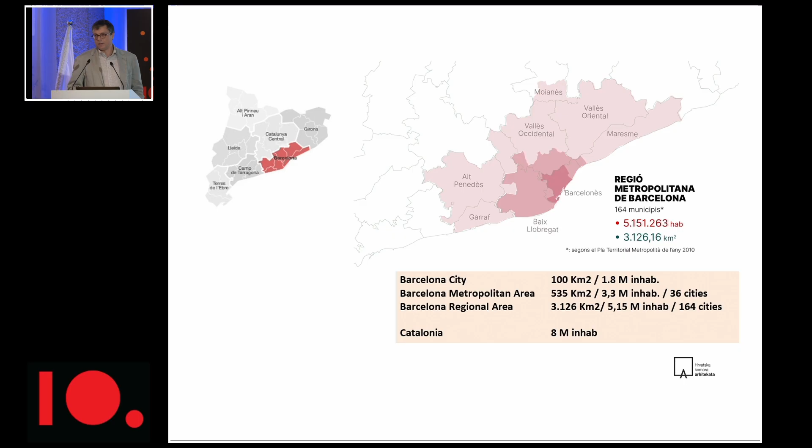Let me start by introducing the territory, because we will refer basically to two different territories. The city of Barcelona is actually a small city with only 100 square kilometers and almost 2 million people, but within a metropolitan area and regional area with 5 million people living there. We will also shift into Catalonia, the regional area, with 8 million people, though you can imagine most people concentrate in the central littoral area around the city of Barcelona.

Why do we say we are suffering a housing crisis in Barcelona, Catalonia, Spain, probably across Europe? The first figures show that 30% of income is the maximum recommended economic effort for families. The figures show that only 30% of families are spending less than 30% of their income right now. Even more, over 30% of families must spend more than 50% of their income to afford a house.

This means there are a lot of people who spend all their money on housing, and have no money left for culture, sport activities, or of course holidays. So this is a very serious problem right now.

Why is this situation happening? We have an important shortage of public and social housing in Spain, Barcelona and Catalonia, with only around 2% of the total housing units. For instance, in Barcelona we have 800,000 main units, and only 2% are social housing.

Over-tourism pressure is replacing fragile profiles like elderly people or families with children who cannot afford the rental prices and must move to other territories. It's right now one of the main concerns in the city, and many protests from neighborhood movements are asking the different administration levels to address the problem.

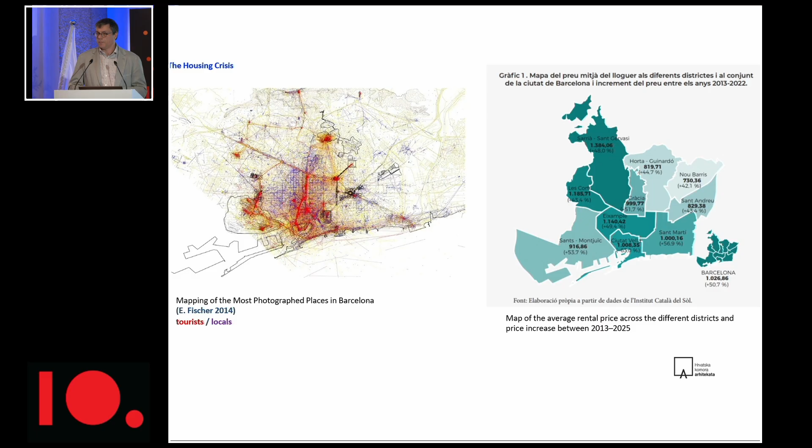We have another important problem: an unbalanced distribution of social housing across the city of Barcelona. This is because the only way to obtain land to build social housing was through new residential developments, which were mostly concentrated on the periphery. So 90% of the social housing right now is on the periphery. You can imagine this creates a social segregation effect across the city, which has also been an important issue to address.

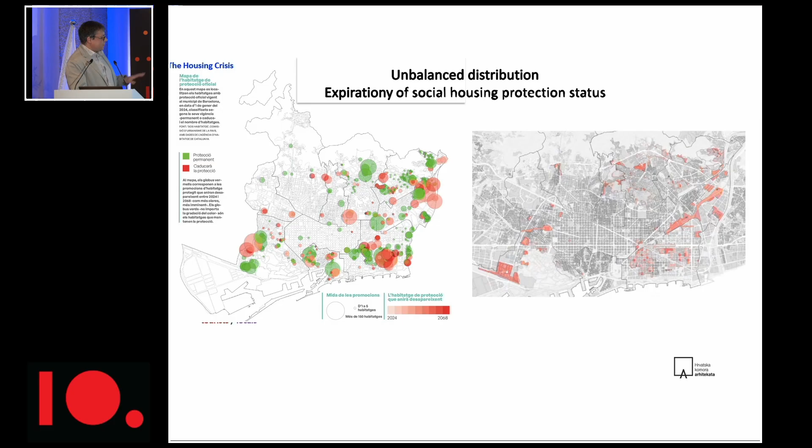That covers the problems. The second part is probably the most boring part of the lecture, about the legal framework in Catalonia, but I thought it was interesting to give you some main ideas about how this legal framework works.

We basically have two parallel tracks. There is a legal track on the urban planning framework coming from regional law, identifying the different planning levels from the territorial level down to the local plan. It's important to keep in mind that it's in this local plan where all public policies on social housing must be incorporated.

This includes the percentage of new social housing in new developments, the possibility of creating a specific zone identifying social housing, or even incorporating new tools like a preemption right — we'll talk about that later — or the 30% rule in this local urban planning document.

And parallel, we have the sectorial housing planning. The sectorial housing planning also has the same different scales, from the legal and different laws from 2007 with the right to housing law, the right to housing plan, and different amendments that have been incorporated later.

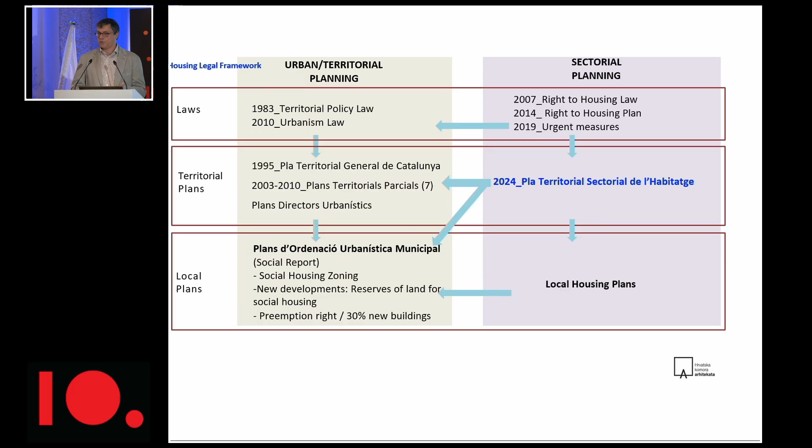It's important that we have recently approved a new territorial sectorial housing plan. This is the most important document right now. It's defining which are the future goals in terms of housing policies, and it's also defining which conditions must be incorporated into these territorial and local urban planning documents. There is a lower level where different cities can develop the goals coming from this territorial sectorial plan into local plans, identifying more detailed tools and actions to reach the goals coming from this higher scale.

About the different concepts, I've been talking about social housing. When we use the word social housing, we are also referring at the same time to public social housing, so the ownership is from the city or from the regional government. But social housing can also be private ownership, meaning there is a limited price for sale or for rental.

If we go into the territorial sectorial housing plan, Sere showed this picture before. Basically, the plan identifies which are the areas with the highest needs in terms of social housing. You can imagine where the population is concentrated, this dark gray color identifying the most needed areas in terms of social housing, areas with strong and proven residential demand.

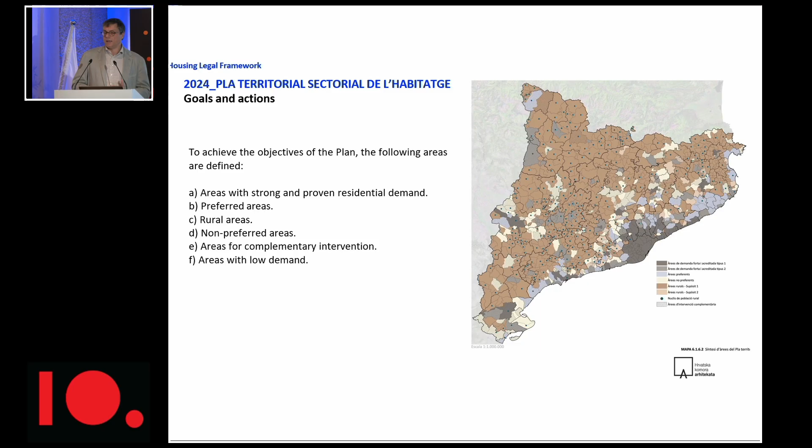The plan basically identifies 6 different levels according to the goals defined for each of these levels. For areas with strong and proven residential demand, the plan identifies a main goal, I think for the year 2045, that these different cities within the area will provide 15% of the total existing main dwellings as social housing. We are right now around 2%, so this is a huge challenge in order to reach the different goals in 20 years.

And the territorial sectorial plan is also providing different tools. Sorry, I don't want to miss this idea: between this 15% of social housing, 9% should be for rental and not for sale.

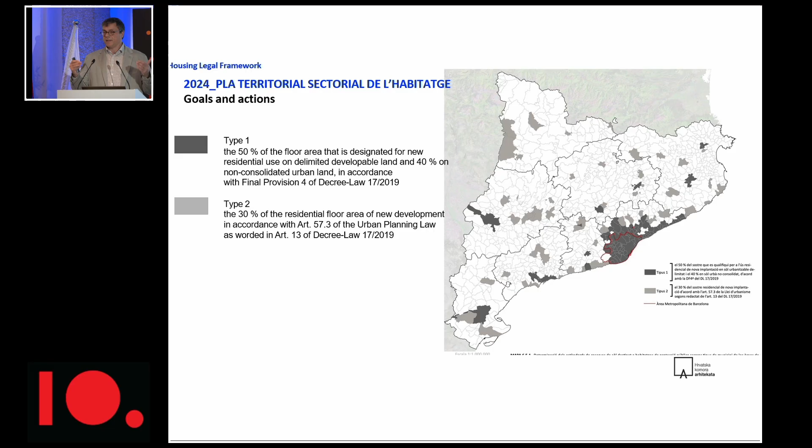The plan identifies for these highest demand areas some different conditions for new residential developments. For instance, for every new greenfield residential development, the project must preserve 50% of the total built floor for social housing, and for brownfield developments, 40%. Before this sectorial plan we were at 30% as an average across the territory, so the sectorial plan is upgrading the percentage that must be reserved in these new residential areas.

Okay, now let's step into the past to recover experience from 2008. You can imagine, considering the date, that it did not have a good finish because of the crisis at that time. But I thought it was interesting because at that moment we had a progressive regional government, and the government opened a new program aiming to develop 100 new residential areas across Catalonia.

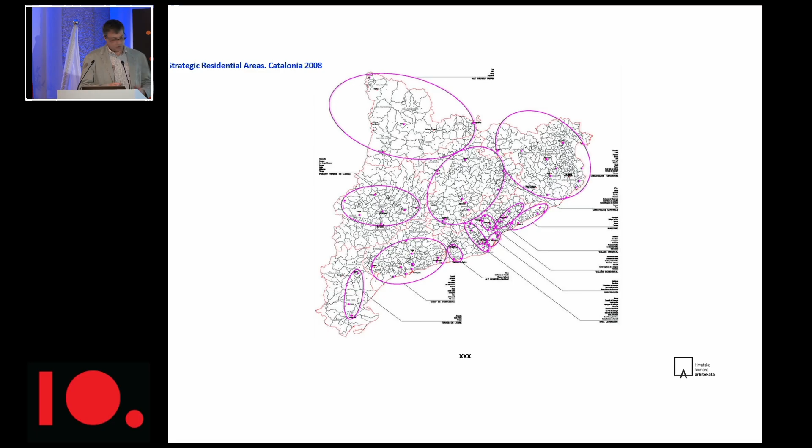You can see here the attempt to balance new residential areas across the different areas of Catalonia. Basically, the government opened a call to the city councils to receive proposals from the territory, and after receiving the proposals, identified these 100 new residential areas. There were different categories and sizes, from smaller ones to probably medium or large size areas with more than 800 dwellings.

And which were the conditions? Basically, the regional government provided the documents, affording the elaboration of plans and approving them, giving them already approved to the city councils to prepare the urban planning duties to be developed immediately. The conditions were that all these new residential areas had to allocate 50% of the total housing units as social ones. And it was also interesting, the program provided quality guidelines for residential development.

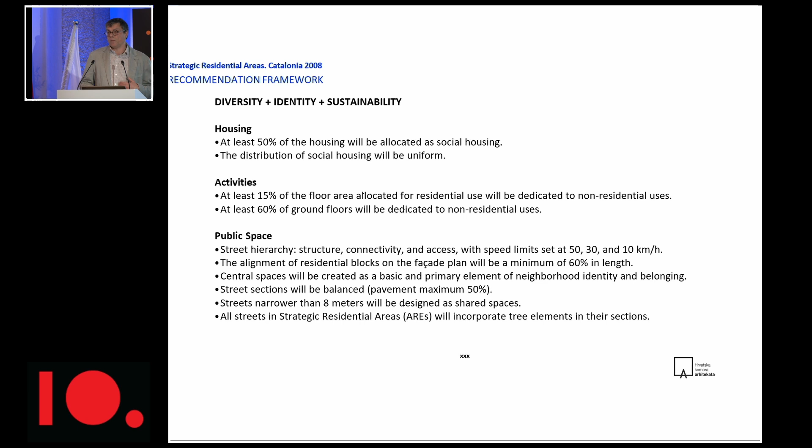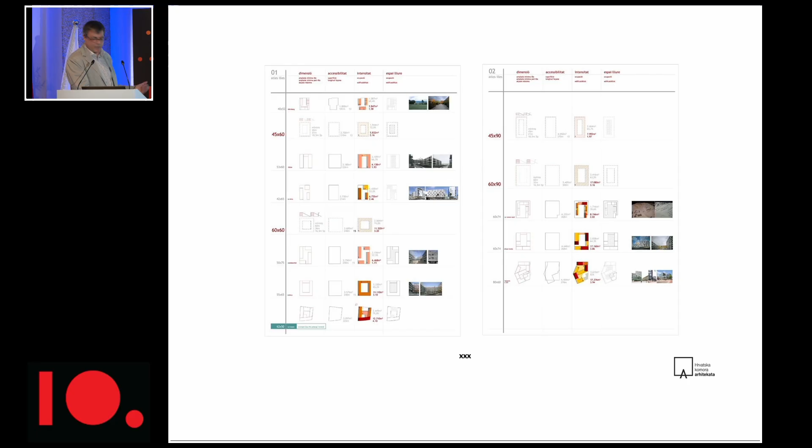I had the opportunity to work with the team who elaborated these guidelines for new residential areas in Catalonia, identifying good practices in terms of urban fabric or residential blocks, trying not just to develop a huge amount of new dwellings or residential areas, but incorporating new quality criteria in order to produce new urban fabrics with standards across all of them — standards on the urban morphology, we could say, with this new blocks catalog.

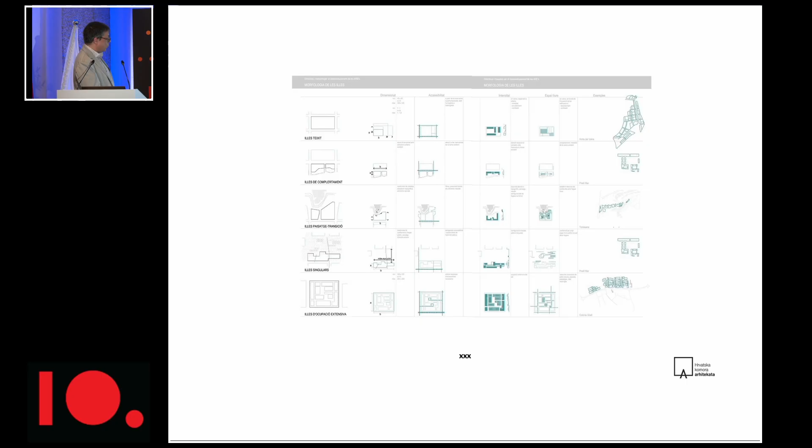Let's go to the last part, probably the one closer to me because I was directly working on some of these new projects. In 2015, Barcelona got a new mayor, Ada Colau, a woman coming from the right to housing movement as an activist. So housing policy was, for the first time, a very important issue with high priority in the different works we were developing.

Barcelona is not an easy city in order to provide new social housing. As you saw before, it's a small city with high compactness and high density, so it's already a built city with only a few brownfields to be transformed in the future. The main challenge was how to create new social housing within this consolidated urban area.

We'll tell you about some different new tools. The main goal was to increase social housing units. In 2015, the city had only 7,000 units out of the total 800,000 units the city has. So the main challenge was how to increase as fast as possible this number of social housing units, deploying a wider set of different tools.

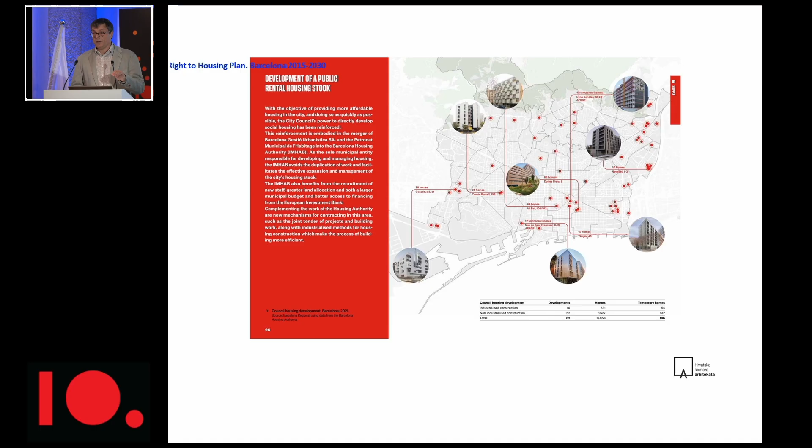Within these areas that were already planned as social housing, the city probably made its most important effort building new social housing collective buildings. The goal was not only to build a lot, providing a huge amount of new dwellings, but incorporating innovative processes and innovative goals. One of them was to promote cooperative new initiatives like this one, La Borda cooperative project, designed by our colleagues, Lacol.

It was not a huge amount of dwelling units through this mechanism of cooperative projects, but it was very important because it's providing a new way to understand how the collective housing buildings should be.

Most of the residential buildings in Barcelona don't have any collective room to be shared by neighbors, or even the entrance room is just a tiny corridor to get to the elevator or stairs, but there are no places to promote collective life.

So that kind of cooperative project is providing a new imaginary, I would say, of how this residential collective building should be. This is, for instance, the entrance of the building where neighbors can gather or meet someone coming from the street, or children can stay just playing themselves.

This is a collective shared room. I remember some colleagues living there during the lockdown - it was a very useful room to develop different collective activities, while people that don't have that kind of space are not able to.

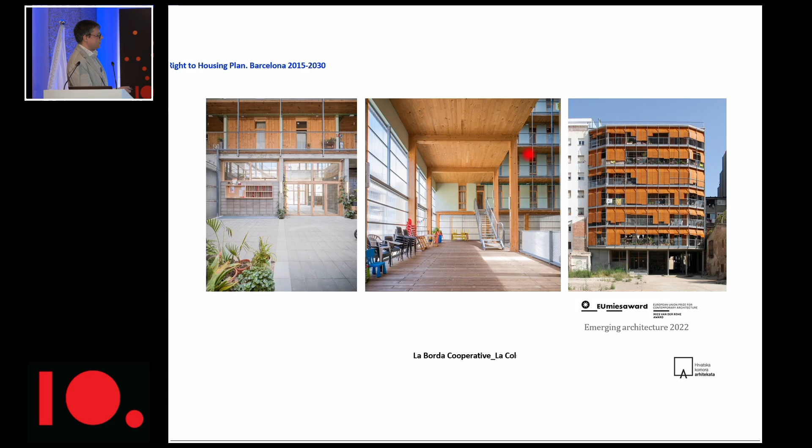Or even incorporating new energy control mechanisms in the building, in the south facade for instance. So the idea is not only improving affordability conditions, but also incorporating innovative typology solutions.

Also innovations in terms of technology - this is a 12 dwelling building promoted by the City Council, and it was designed with shipping containers that were already prepared in the workshop, then arrived on site and were just assembled as a new building. It allowed this 12 dwelling building to be built in just, I don't remember, about 12 months.

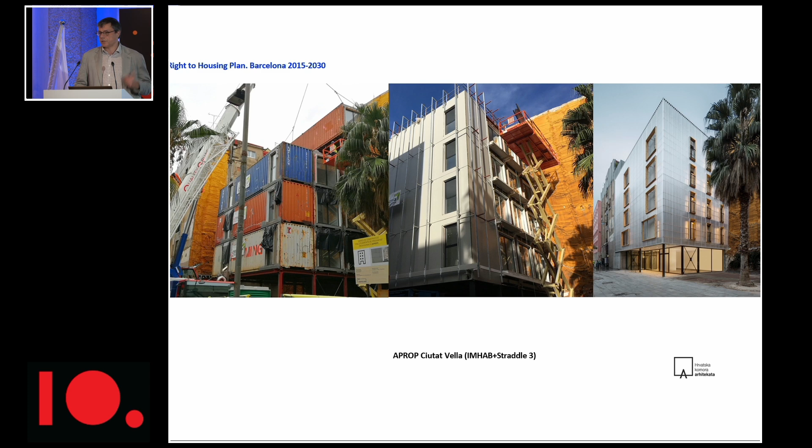So it was a kind of assembled process at the same place. This is the final picture of this, very interesting. Right now there are 2 more buildings built thanks to this new technology, just reusing shipping containers. I think there are some pictures showing the distribution where you can clearly identify which are the units coming from these shipping containers.

This is a new building that is already finished. There was the idea to incorporate new structural technologies like wooden structure. Right now, this is the highest residential building in Barcelona built with wooden structure.

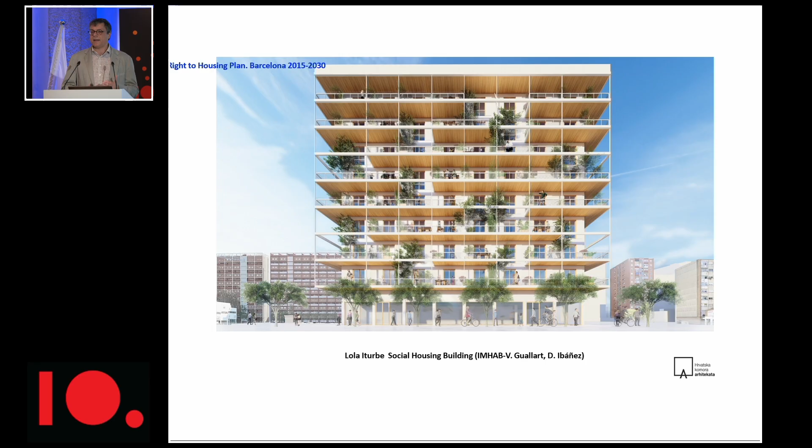It's also incorporating a very interesting thing. Usually in that kind of public buildings, nobody knows what to do with the ground floor or the rooftop, because the main goal is to provide housing, and the public companies are not prepared to manage uses that are not residential, like the ground floor or roof floor. At this project, the designer provided a new ground floor area expected to be used as a public facility for the neighborhood.

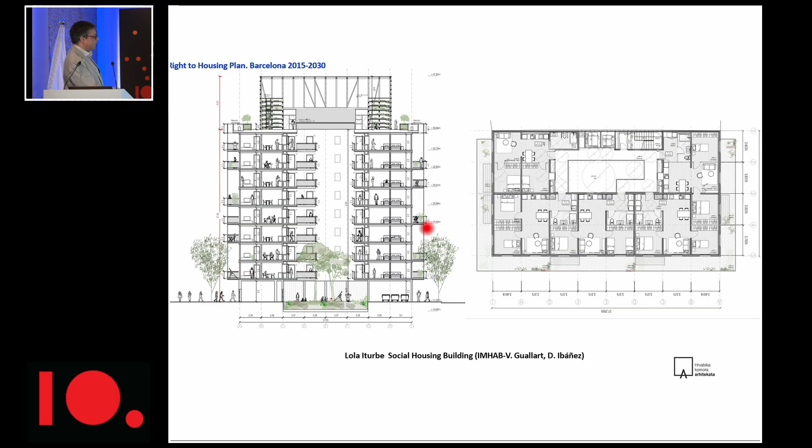And on the rooftop, there is a greenhouse to be used by the people living in the same building, to create agriculture or different areas. In my opinion, it was an upgrading action to activate also the ground floor and the rooftop as a collective, integrated project, within the different dwellings on the different levels.

But remember, the most difficult thing is how to provide social housing on those areas that are completely consolidated. What the City Council did is approve a plan amendment that incorporated this right of preferential purchase, or right of preemption. It means that when there is an agreement between two privates to sell a property, the City Council can match the price and get the property.

So during these years, the City Council spent a lot of money buying different properties, basically in this central area, otherwise it would be impossible to get social housing there. Many times it was also a strategy to protect people living there who had the risk of being pushed out of the building because the new owner wanted to increase rental prices. So it was a double mechanism: to protect people living there and also to provide more housing properties across the city. This is the budget evolution through these years, and the total figure is around 165 million spent just buying that kind of properties across the city.

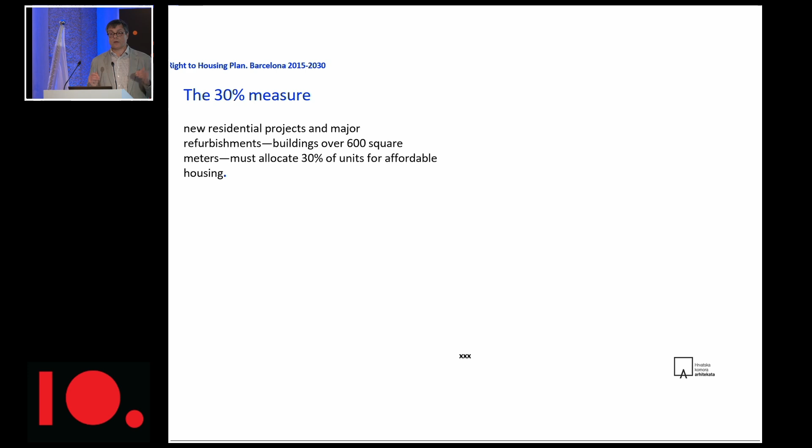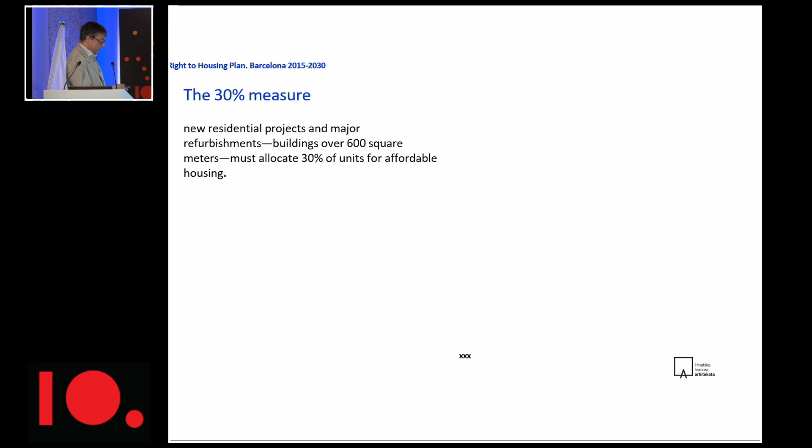But we know from other cities that had this measure a long time ago, like Paris or Berlin, that it's working properly. It needs time to adjust some prices, but in the end it's working perfectly. Till now, there have been around 25 new social dwellings thanks to this measure. But the most important thing is these 25 new social dwellings have appeared in those central areas without any social housing before.

And this is the last tool, coming back also to tourism. This is a use regulation plan trying to control tourist accommodation across the city. It was a plan that had a first approval in 2016 and a second one in 2021.

Basically, the plan identified a central area where it's considered there is too much tourist accommodation right now. So there is a degrowth strategy: when tourist accommodation closes, it cannot be replaced with a new one. So the idea is to reduce the amount of tourist accommodations in this area.

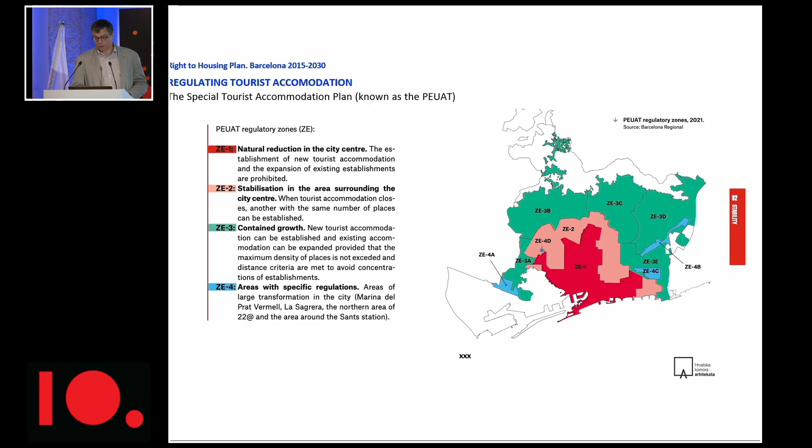At the same time, the second strategy is to push new tourist activities and tourist accommodations into those areas where the limit can still be reached in the future. So basically, there is a degrowth strategy in the center and a moderate or contained growth area elsewhere. The idea is to distribute the different tourist accommodations across the city in a balanced way.